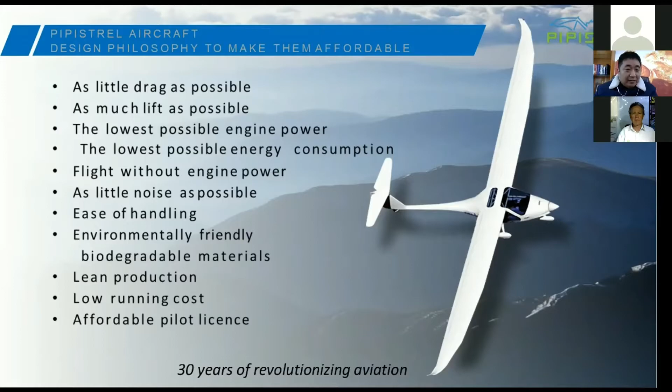Basically, we do the whole range from R&D all the way to certification and production. We now have an operation base in Slovenia. We have our own R&D center also in Slovenia, and we have production capacity in Italy for our four-seater Panthera. And of course, for the past 5 years, we have been expanding to the Asia Pacific market, predominantly China. We have also been setting up a factory in China, near Nanjing, in a local city known as Jurong. So we do most of the customer tailor-made work, from concept to R&D to the actual molding and testing, all the way to production and finally certification. So that's just a basic background of what we do. Next slide, please.

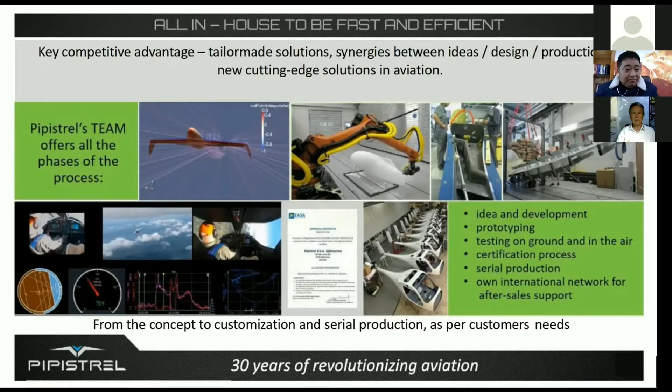In terms of certification, we are very proud of having more than 120 different certifications globally. Slovenia is the first EU country to sign a bilateral agreement with China, dating back to 2008. And with the visit of the current CAAC administrator to Slovenia in 2016, we have enhanced that. We now have a total of 4 different types of aircraft that have obtained the Chinese PTC. So we have quite a range of different aircraft we can fly legally here in China. Next slide, please.

For the year 2020, we have made some tremendous progress in a few of our developments and aircraft. Now, first of all, many of you might have heard, we have now launched the SW121, which is now an EASA certified aircraft. I won't go into too much of the technical details, as I'm sure Tina from yesterday has probably done so.

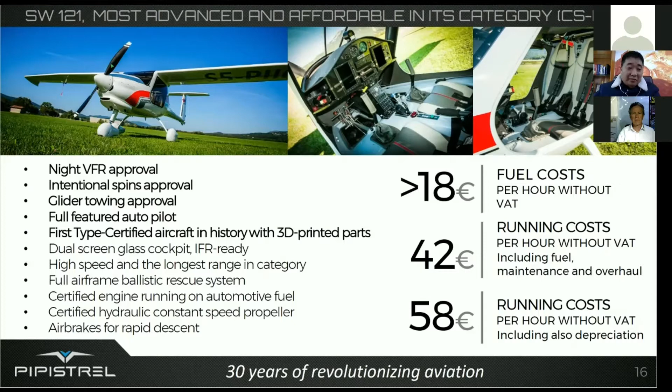And also the Alpha Electro aircraft, which is one of the aircraft we are now in the progress of setting up the production assembly for here in China. This is certainly one of the first electric aircraft that has been in the production procedures. It heavily reduces the cost in terms of flight training, maintenance, and usage.

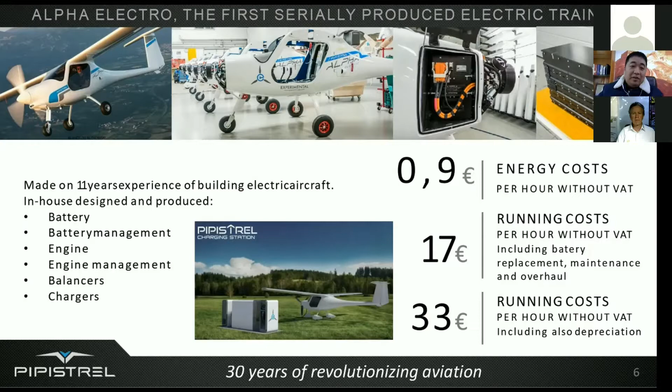In terms of electric, this year we have also launched the Velis Electro aircraft, especially with our state-of-the-art Pipistrel designed electric motor as well. This has been the first electric motor ever certified by EASA, and certainly we see a great potential of this electric motor in the future markets. Next slide, please.

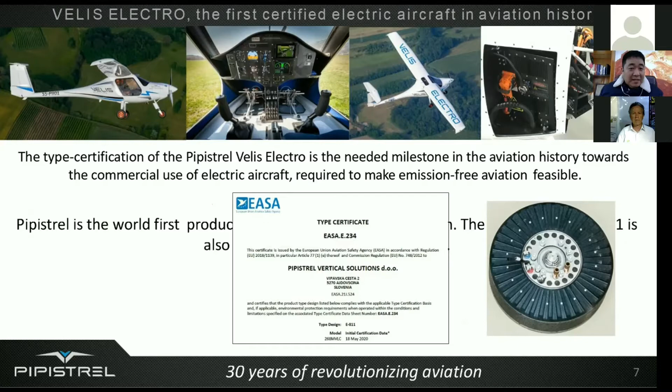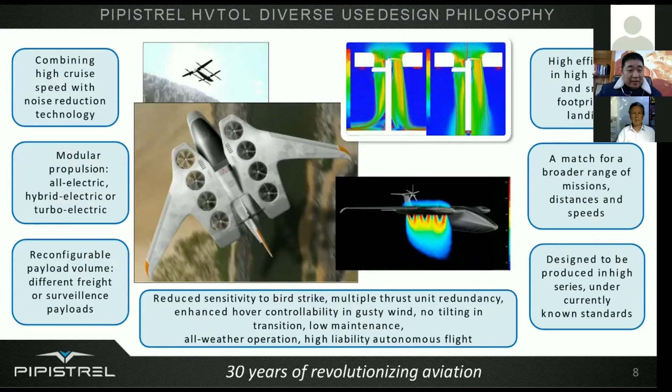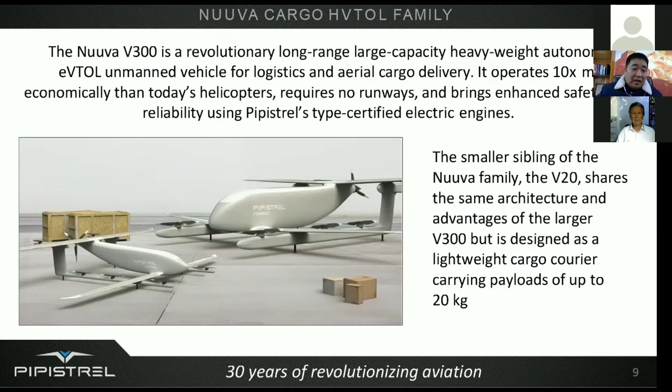This is the Nuuva V300, which has been released this year. It is still in testing phases. Tina and Evo, I'm sure they've been doing a lot of promotion about this vertical takeoff for logistic cargo. The technical data of this is great. I won't go through too much detail, but we are expecting a lot of good progress with this, especially as we are one of the few leaders of these vertical takeoff logistic cargo systems. Next slide, please.

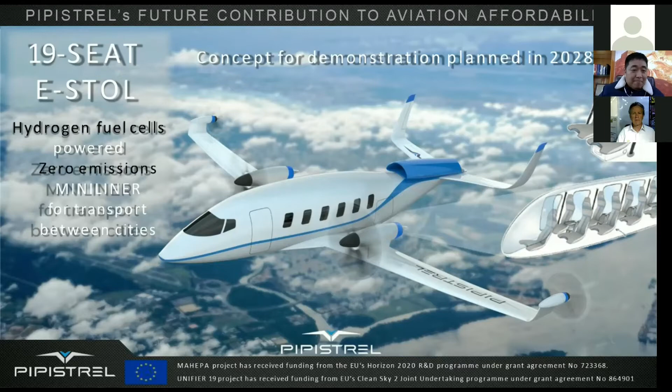And this year we have made some tremendous progress with our production center in China. We have based ourselves for the last 3 years in the city of Jurong, which is right next to the great city of Nanjing. The whole concept involves a production facility, an R&D center, and also our private airport, with the capacity of operating everything from tailor-made for individual customers all the way to mass production. Next slide, please.

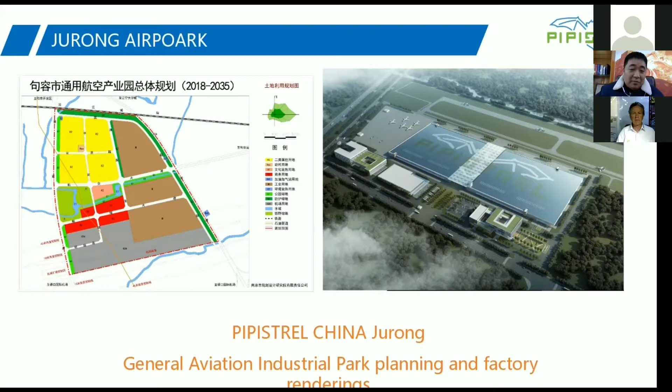Yep, and as you can see, this year, despite the global pandemic, we have been moving very fast, and finally we have obtained all the right certificates, the permit to fly in the airspace, and as you can see, our R&D center. I'm very happy to say the structural building was completed just last month. It's a 4-story building with a total space of over 12,000 square meters. This will be our main office and the R&D center, and the production center will soon follow in 2021. So hopefully by the end of 2021, we will be at the stage of putting together the electric aircraft, the Alpha Electro, in China.

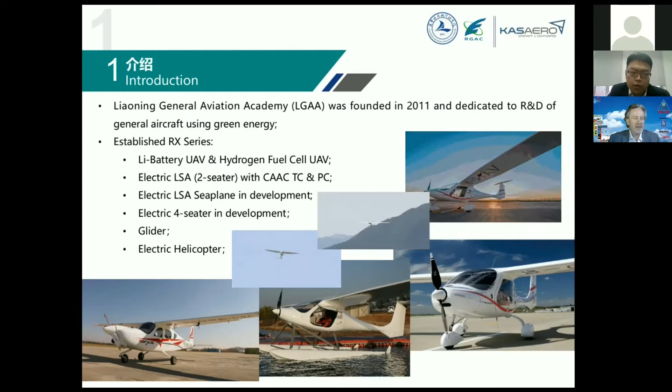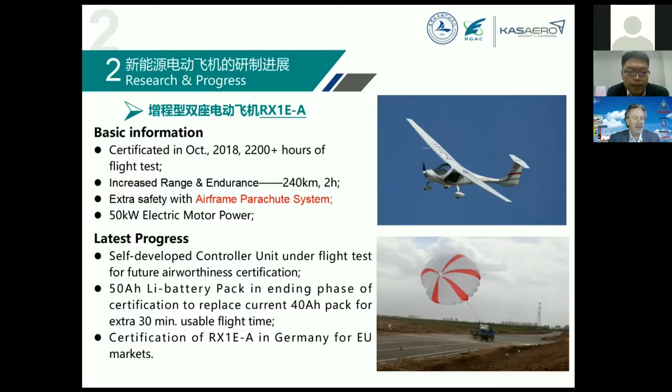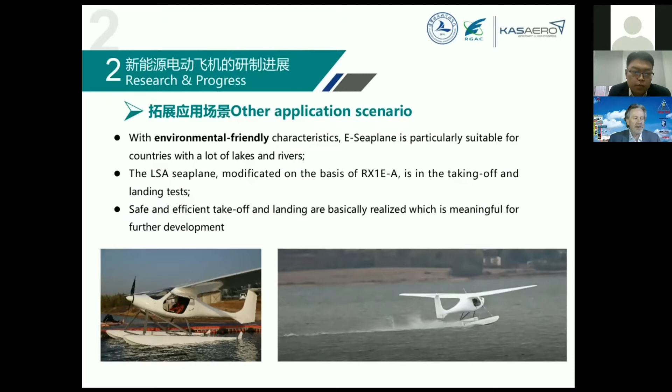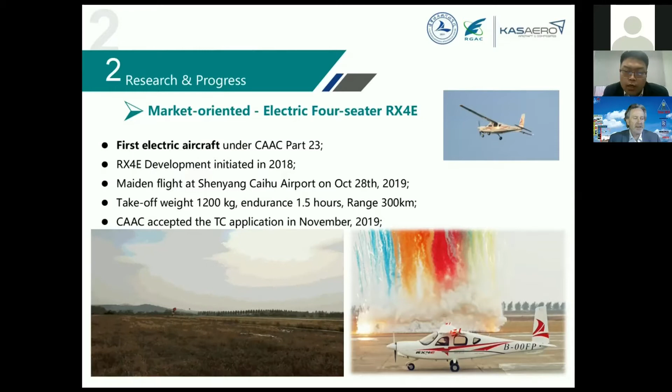Talking about the certification basis, according to the experience of the electric two-seater, we discuss and cooperate with CAAC to compile the Chapter H draft, which is the certification basis of the electric power unit for Part 23. And we cooperate with CAAC to compile a special condition draft for RX-4E. We cooperate with Shenyang Aircraft Center to research the EPU certification standard and compile compliance methods. Next page, please.

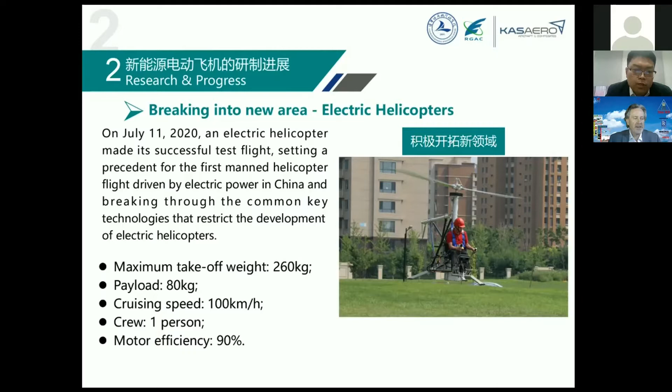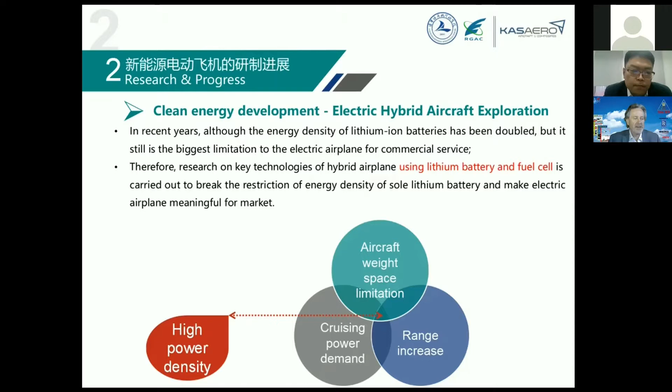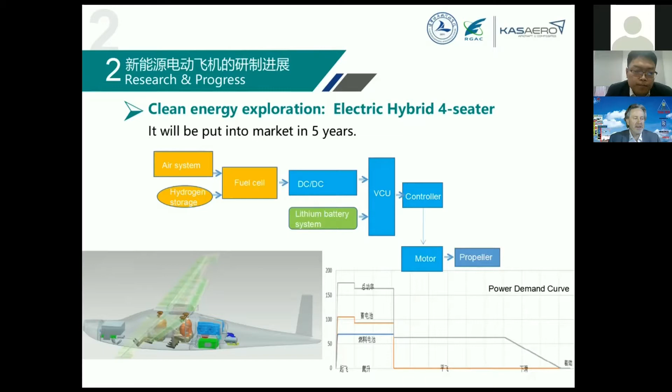Talking about cooperation, we already cooperate with a lot of companies, and we are going to cooperate with other companies who would like to develop e-planes. And next it goes to Kasaero to talk about the cooperation between us for the RX-1E-A certification in Germany. Next page.

I think, no, he's unmuted.

Thank you. Thanks to Yilin for his introduction to the development of the electric aircraft. So in this part, I will introduce the certification progress of RX-1E-A in Germany. I think this part is more interesting for our Chinese friends, so I will switch to Chinese. And you might need to change your audio track.

Okay. Well, first, let me talk about our Kasaero company. Our Kasaero company focuses on general aviation and carbon fiber materials. Our engineers are proficient in the entire process of aircraft development and manufacturing certification, and we've achieved 3 TCs within 4 years. Because of this, we can quickly understand the technical design details of the RX-1E-A aircraft and assist our Chinese partners in certification work in Germany. Next slide, please.

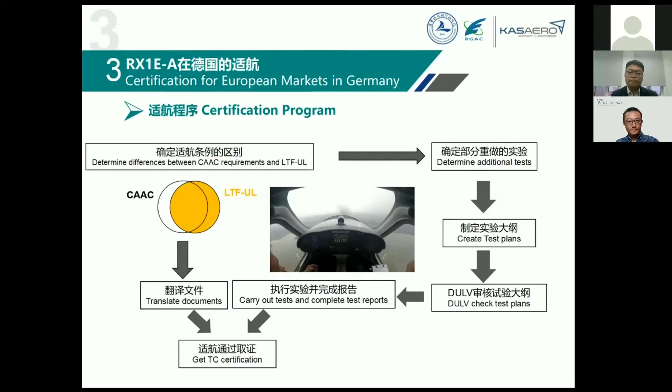Okay, last page. Due to the pandemic, the certification progress has slowed down, but we will strive to get the airworthiness certification in the first half of next year so that it can fly over Germany as soon as possible. So that's all for me. Thank you.

One click too slow. Thank you very much. I think I have already listed several questions, but I will wait. I have to be patient as well. Thank you very much for doing this. It's also because we had this aircraft at the Aero already some years ago, and a lot of people were asking. So hello, Maarten. Our next presenter is already online. Perfect. We should unmute him, and yep, he's unmuted. So I give you the stage.

Why did we start this hybrid project? Well, as everybody knows, general aviation is slowly making a shift towards electrification, and we as Diamond wanted to follow. So with this project, we wanted to show that the integration of a hybrid power plant is able to reduce the fuel consumption, reduce the emissions, and at the same time increase the overall efficiency. And with this aircraft, we really wanted to have a physical proof of concept, a so-called technology demonstrator, but also for the development of a certification basis for future development.

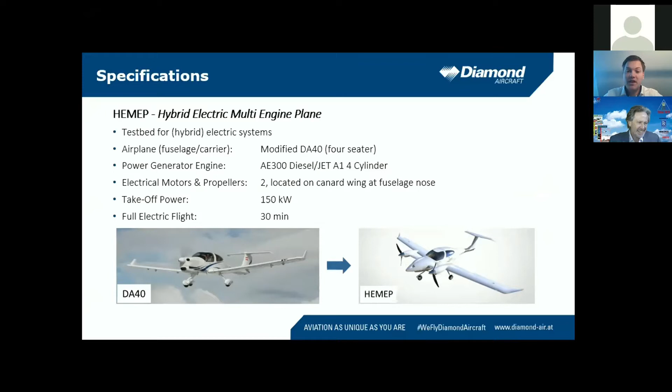And this led to the kickoff of HEMEP. HEMEP is basically a modified DA40. It's the exact same fuselage. What we did for this project, we basically took off the gearbox and propeller and put in an electric generator unit in the front. And for the electric propulsion, we added 2 outriggers, engine pods, distributed propulsion units, both housing a 75 kilowatt engine.

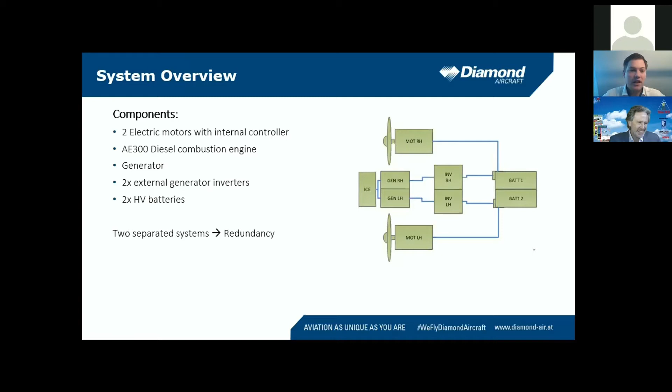So how does this system work, or what does it look like? It's basically a symmetrical system having a left-hand and a right-hand side with 2 motors connected to 2 batteries which act as an energy buffer. Up front we have the combustion engine which powers the generator. The advantage of having 2 separate systems is, of course, redundancy. And with this redundancy, we add another level of safety, which allowed us to safely test out this new technology.

The aircraft can operate in several operating modes. We can operate in full electric mode, where the battery provides power for propulsion and the generator unit is switched off. With this, we have a 30-minute endurance, and this mode is used, for example, for takeoffs. Therefore, you have no local emissions and also a lower noise footprint. We also have cruise mode, where the generator provides just enough power for flight, and full power mode, where the generator runs at full power and is able to recharge the batteries during flight.

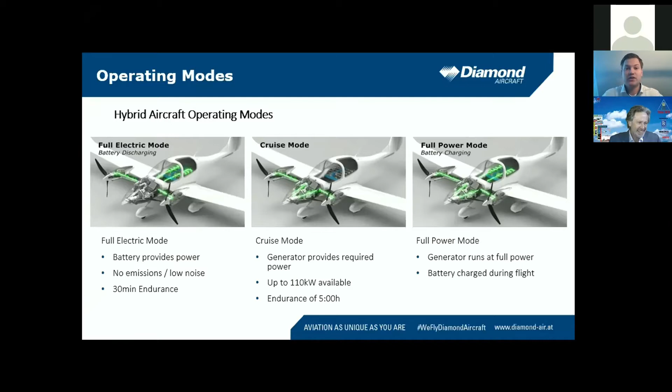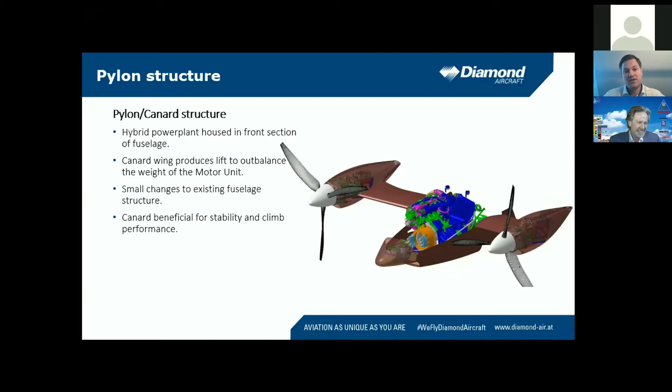So the whole hybrid power plant is housed in the front section of the aircraft. And you might ask, why do we use such an architecture? Well, that's twofold. First of all, because we're modifying an existing aircraft, we want to leave the rest of the aircraft untouched, and therefore all the modifications were only done on the front of the aircraft. And secondly, the canard wing up front helps balance the additional mass of the engines and also increases stability of the aircraft.

So then the electric powertrain consists of two separate propulsion systems. The maximum power output of the aircraft is 150 kilowatts on the shaft, each motor being able to provide 75 kilowatts.

And the system runs on a 450 volt level, powered by two 24 kilowatt hour batteries. And on this battery alone, we can fly for an endurance of 30 minutes. But with the 110 kilowatt generator, we're able to increase the endurance from this 30 minutes to over 5 hours. And that shows a real benefit of these hybrid aircraft.

And the generator itself, this converts the rotational energy produced by the combustion engine into electrical energy. And it's attached directly to our AE300 Austro engine and runs with efficiencies over 90%. Also within the generator, we have two electrical coil sets, which means even if it's one physical unit, it's still two separate electrical systems. So it has an electric redundancy.

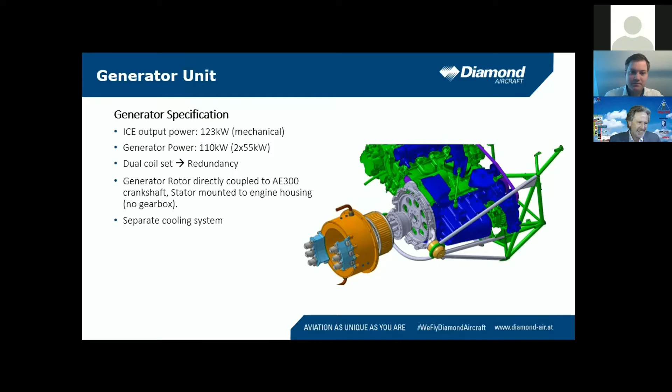So after all this designing and development, which took over 4 years, we were ready to do the first tests. And this is to determine the functioning of each component. And we tested the cooling systems, the high voltage systems, looked at the readback of critical parameters. But as you might know with any development project, this is also the first time you get feedback, and you also get a big list of things that do not work yet. So it was a big challenge to get things completed.

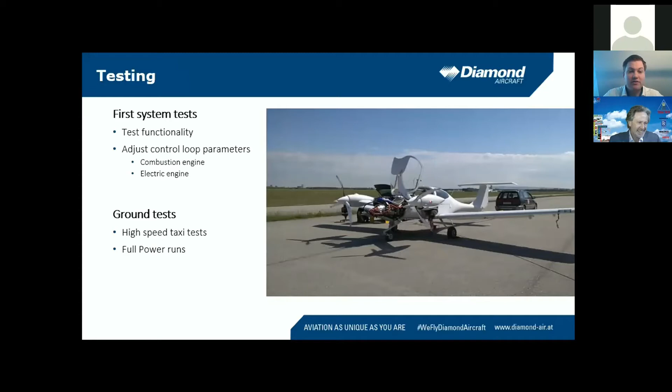We also did some high-speed taxi tests to determine the stability of the aircraft and also some full power runs. And then after that was done, we were ready for the first flight, the so-called maiden flight. And we did that on an early morning where cool and calm conditions prevailed. The reason for that is that we did test and calculate the stability of the aircraft, but we were only able to test it up to takeoff speed. And to not take any additional risks, we want the atmosphere to be as stable as possible, so that we are 100% sure that it will function safely.

Then just before takeoff, the test pilot does a quick full power run just to test that both systems are stable and the temperatures are stable. And then he was off, and the takeoff was uneventful. And actually within 1 minute, the pilot radioed back to the ground that the controllability and handling of his aircraft were actually far better than he expected. And also the achieved rate of climb was better than the DA40, which is also due to the increase of power.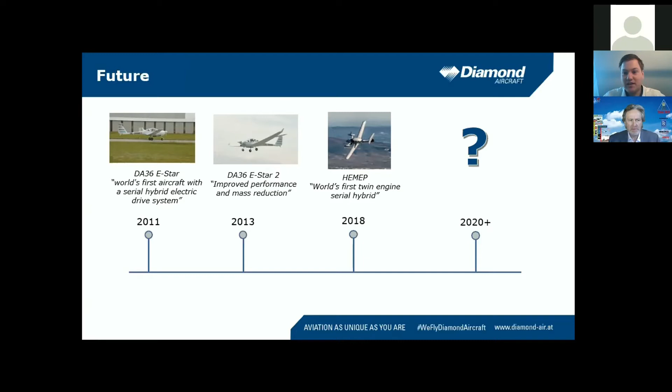The current battery technology allows for small full electric aircraft, and we also expect this first successful application of electric aviation to be in the pilot training market. This is why Diamond at this moment is developing a green pilot training solution, the DA40EP, which is a full electric four-seater for pattern training and near field operation.

And it will be equipped with a fast charge battery system, but also an option for swappable battery. Endurance of around 1 hour and 30 minutes, which may not sound much, but that's with the current state-of-the-art batteries, and will be expected to increase in the future, of course.

And the philosophy within Diamond is to have an identical cockpit layout between this version, so the electric version, and the classical combustion engine version, which means that during pilot training, you can very easily make the conversion between the two types.

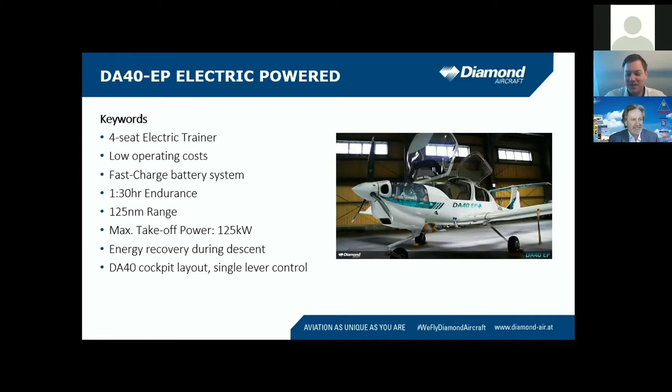Well, and I think the whole aviation industry is excited to see what the future holds, but one thing is for sure, e-aviation will at one moment dominate this industry, and it's up to all of us to make this happen.

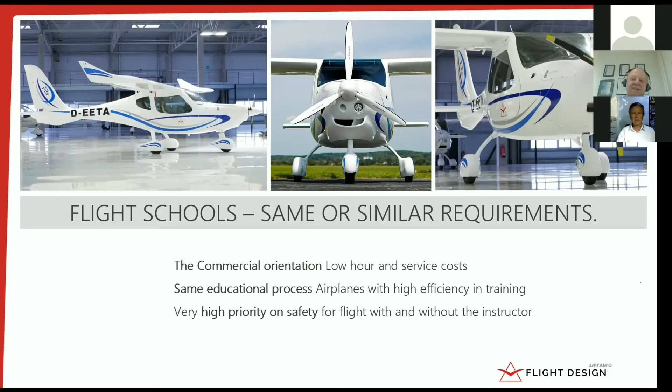A flight school has a much higher ecological impact than a private pilot, because a private pilot flies 50 to 100 hours a year, a flight school 500 to even up to 1,500 hours per year. I had difficulties believing the 1,500 hours, but I've really seen in last year's logbooks of flight training academies that they really log 1,500 hours per year.

A higher fuel consumption, with that CO2 emission per airplane, when you use 18 liters of fuel per hour with the Rotax engine to 40 with a conventional aircraft engine. And additionally, you have a high public visibility, because a flight school is known, the aircraft fly a lot, they start a lot, so it's present.

That at the end leads that 100 flight school airplanes are the equivalent of 1,000 to 3,000 privately used airplanes. And this is really a lot. And with that, when we say as a private pilot, where you fly 50, 100 hours a year, the reduction of the CO2 emission is not a real big thing. But when a flight school with a high usage of the airplane reduces the CO2 emission, that has really a certain impact. Next slide, please.

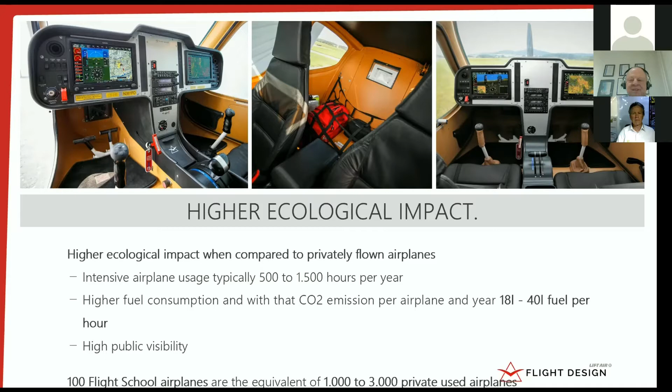Hello? Can I get the next slide, please? Thank you.

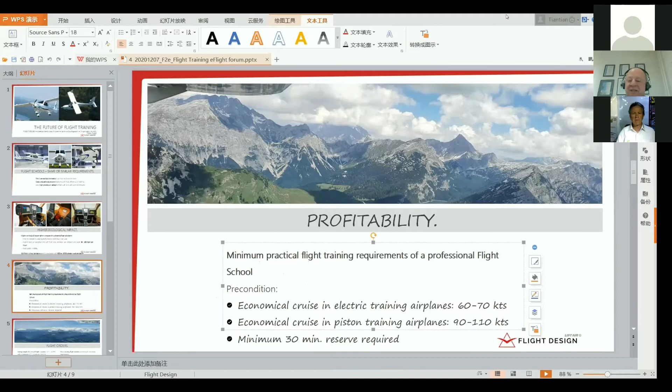Profitability. Minimum practical flight training requirements for professional flight schools are economic cruise in an electric training airplane, something like 60 to 70 knots. Economic cruise in a piston training airplane, maybe 90 to 110 knots. And a minimum 30 minute reserve is required.

So to comply with the low energy density of the batteries today, compared with the fuel, the best is reducing the energy consumption. And this you can do when you reduce the economic cruise. But reduced economic cruise is also extending your flight time in cross-country flights. And in cross-country flights, you have a requirement for minimum distances. So with that, you come very soon to a point where you cannot fly the distance inside the time frame you can fly with the airplane. Next slide, please.

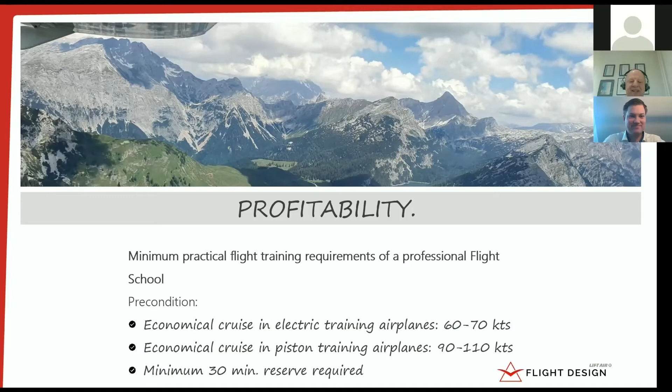The flight orders you are giving: the average length of a circuit flight is approximately 15 to 20 nautical miles, with a maximum of 7 circuits per hour. With that, you have a flight time of 2 hours 15 to 2 hours 50, including 30 minutes of reserve. When you have the same with, instead of 60 knots cruise speed, 75 knots of cruise speed, you reduce your flight time to 1 hour 54 to 2 hours 22, including 30 minutes of reserve.

The cross-country flight distance, according to minimum requirements, is for LAPL 80 nautical miles. When you do a PPL(A), not a LAPL, and you do this with 60 knots of cruise speed, then you have 3 hours of flight time with 30 minutes reserve, or when you do it with 70 knots, you have 2 hours 30 minutes of flight time. A typical cross-country flight time during flight training is 1 hour 30 plus 30 minutes reserve, so it's 2 hours.

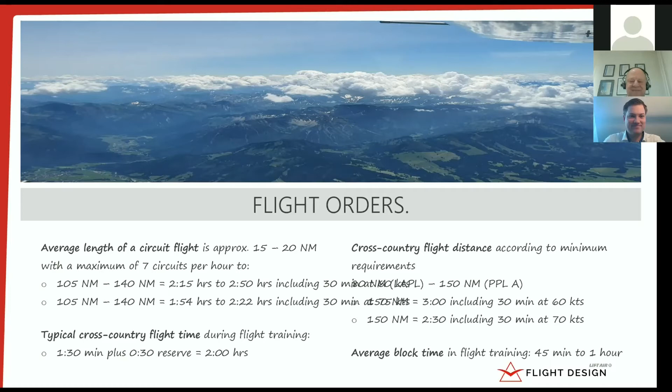So we think that the economic cruise for an electric airplane should be 75 knots. And then you should have a range of 2 hours plus 30 minutes reserve. With that, you need a battery capacity of 75 kilowatt hours at 30 kilowatts for economic cruise. And the 75 kilowatt hour battery weighs today around 375 kilograms; with 200 kilograms of pilot and instructor and a 300 kilogram airplane weight, you end up with a total estimated weight of roughly 875 kilograms.

What we have done with the F2E, where we started originally with Siemens, which is now Rolls-Royce, and are working together with Liaoning in China for the battery system: the F2E is structurally an F4, a 4-seat airplane, with the outside dimensions of the 2-seat F2. And with this combination, we have pretty low structural weight with enough capacity for a battery, and the capacity of the F2E will increase with the development of batteries or of hydrogen solutions. Next slide, please.